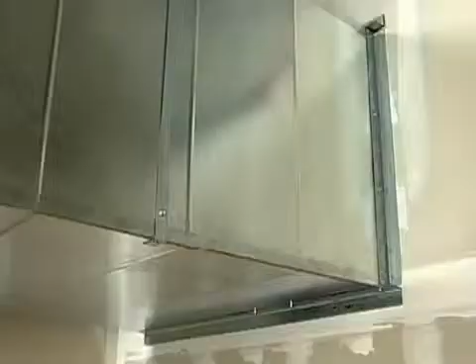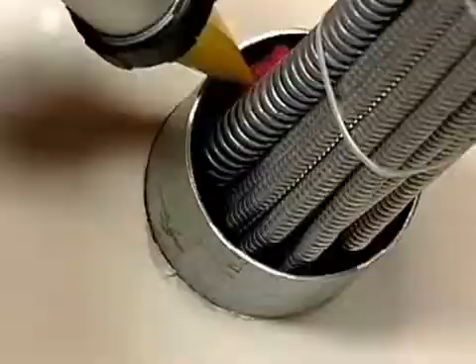Unlike pipes, ducting, and other service items which can be fire stopped and forgotten, low voltage wiring, such as voice and data cabling, almost always require future access. This presents a problem for traditional fire stop methods because many of these products are installed wet and then cured to form a permanent fire stop seal. This makes future retrofit difficult and time-consuming since the cables are literally glued together as the fire stop compound cures.

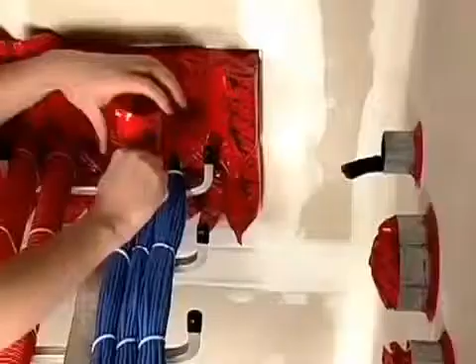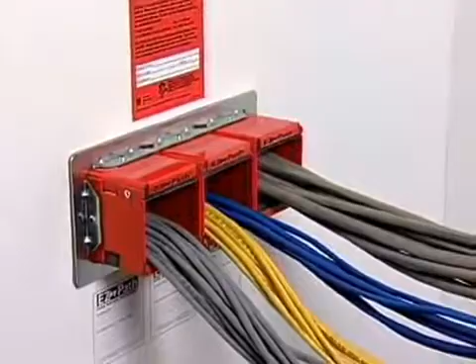There are, however, alternative solutions available for sealing high-traffic openings in smoke and fire barriers, which allow you to easily handle future retrofits. In this video, we'll discuss how to determine what products and methods should be used to properly fire stop high-traffic openings with retrofit in mind.

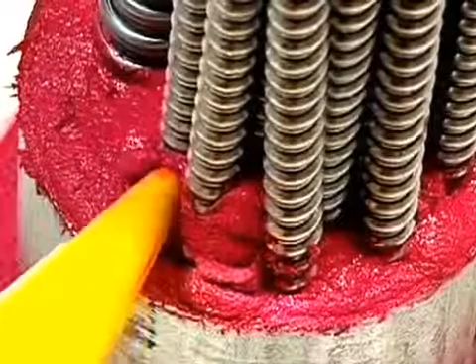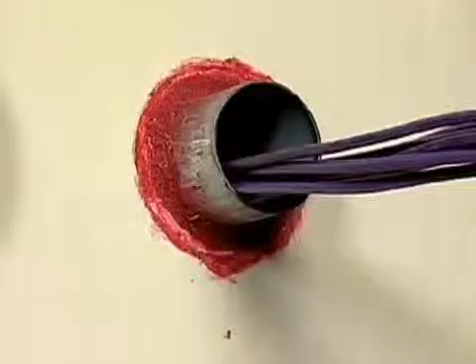Most fire stop materials are designed to be installed once and left alone, which is fine unless future access is needed. Penetrations in fire barriers that may require future access are known as high-traffic openings. The most common examples include cabling through interduct, sleeves, tray, and raceways. A common example is a penetration made in a temporary smoke or fire barrier. While these openings must be properly sealed, a re-enterable fire stop material simplifies the work when changes are made.

Naturally, the amount of change that an opening sees differs from one facility to another, making a universal definition for the term high traffic impossible. For this reason, many facilities have carefully reviewed which penetrations require the most frequent access and physically labeled them as high traffic to remove any confusion in the field.

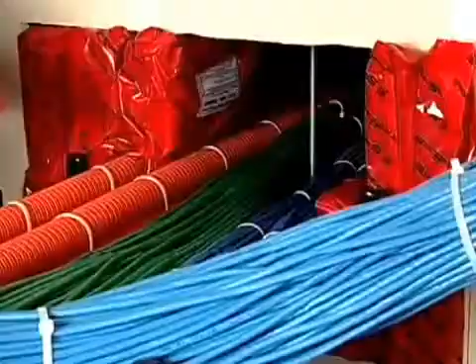Traditional fire stop compounds such as caulk and mortar are not considered re-enterable or retrofittable because they're installed wet and then cure or dry, making them labor-intensive to remove and expensive to replace. Re-enterable or retrofittable are industry terms describing fire stop materials that are specifically designed for high-traffic openings because they can be easily removed and replaced.

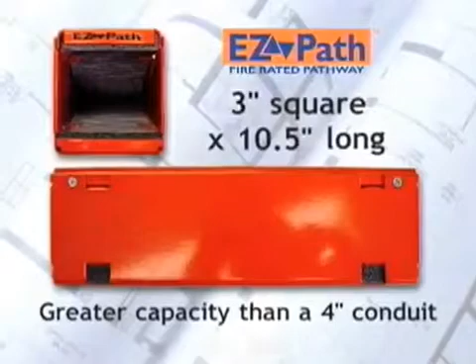Products such as Firestop Pillows, non-curing putties, and newer pathway devices are quick and easy to change and are by far the most popular fire stop choice for high-traffic openings. While re-enterable fire stop materials may cost more initially, they quickly pay for themselves as they don't need to be replaced each time there's a change.

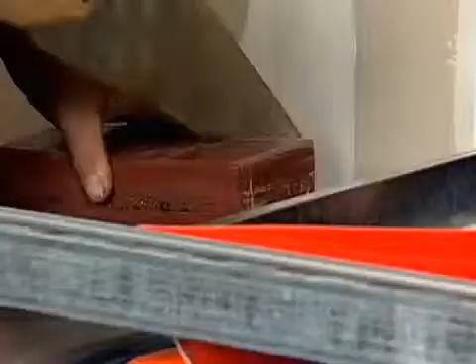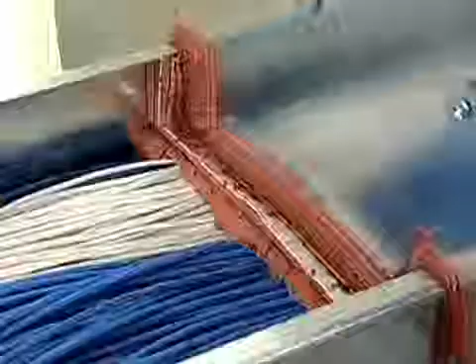Other traditional products used in high-traffic applications include foam bricks and intumescent composite sheets. While both of these products do not meet our definition as true high-traffic products, easily installed and reusable, both, however, are aesthetically pleasing as installed and are well suited for closing down larger openings. The key for both types of products is to design uses where once installed, removal will not be required for future cable changes. An example of this is the use of composite sheets in conjunction with newly developed self-contained Firestop Pathway devices, which we will discuss in greater depth later.

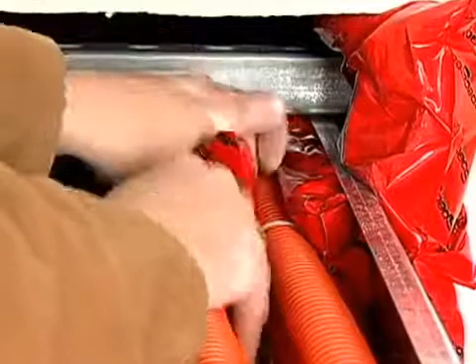Clearly, many different approaches exist, all of which are legitimate products with UL Firestop listed systems. The key to system selection in high-traffic openings is thoroughly understanding the differences of each, so that it is clear not only how easy or difficult a system is to install initially, but also during the many retrofit cycles anticipated over time. Not only will this careful selection process minimize operating costs and improve compliance, but it will also help to ensure life safety.

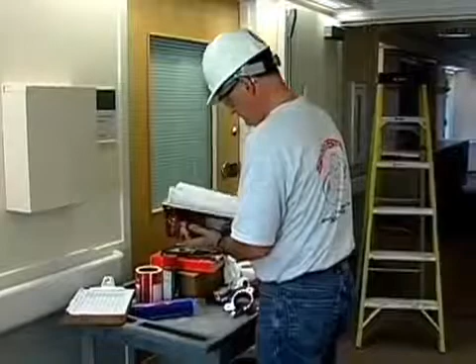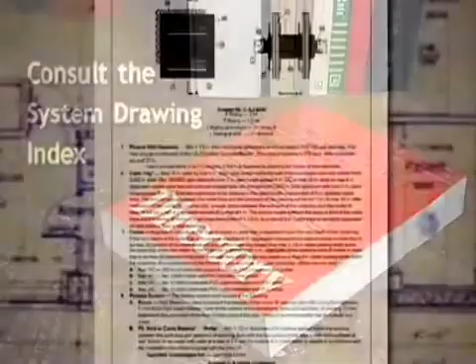Once you have determined that a penetration is indeed high traffic, the next step is to find a UL system that permits a re-enterable fire stop. Many facilities have standardized operating practices that specify this for you. The UL system drawing dictates what products may be used and how they may be installed for your specific application. To locate the proper UL system, consult the System Drawing Index at the front of the UL Fire Resistance Directory. It is here that you will learn if re-enterable products like putty and pillows are permitted, or if a more permanent product must be used.

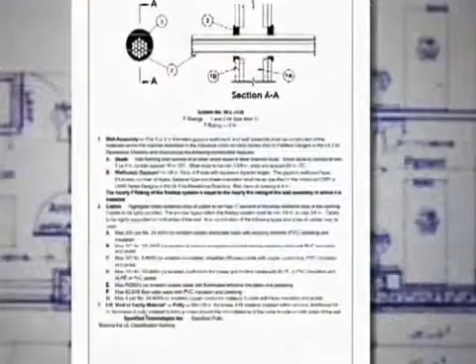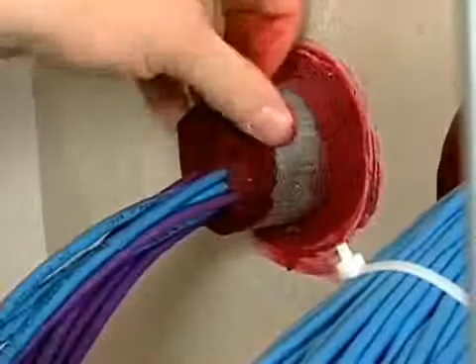In addition, the system information will dictate such things as how the materials must be installed, what accessories are required, and limit such variables as the number, load, size, and type of cables, sleeves, and trays. For example, if we have a small cable bundle through a sleeved opening in a 2-hour gypsum wall, we might search for a system drawing and find that we can achieve a 1 or 2 hour rating by installing a 5/8 inch depth of either Firestop sealant or putty. Because we want a re-enterable material, the system using putty would be favored.

However, that same system has a maximum cable load limit of 47%. So if your as-built condition exceeded that amount, you'd have to either reduce the number of cables in the sleeve or continue searching for another system that permitted a greater cable load. If you come across a non-standard penetration that the UL system drawing doesn't address, you should notify a supervisor who will contact the factory for installation instructions specific to your application.

Now, it's important to remember to never install Firestop without proper documentation. This is your evidence of compliance, which may be required by an authority having jurisdiction. And by strictly following the installation instructions in the UL system information, costly mistakes and liability can be avoided.

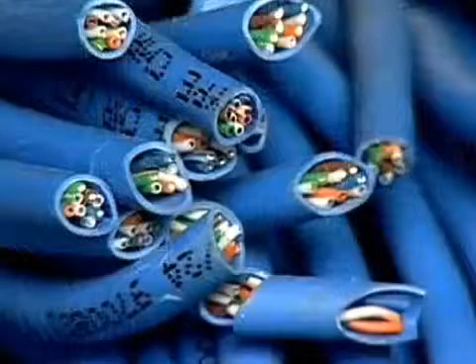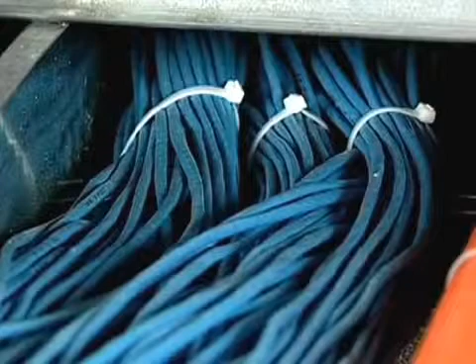While all this may seem like overkill, it's done because Firestop is easily prone to misinstallation, especially in cable applications. Cable jacketing is a source of fuel that burns rapidly and releases lethal gases during combustion. When these cables are bundled together, the fuel load grows significantly and permits a fire to easily breach a fire barrier. This makes the installation of Firestop extremely critical.

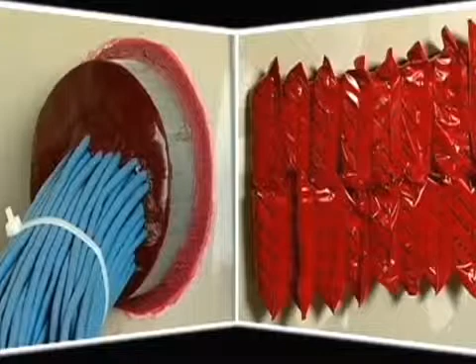While putty and pillows are intumescent and expand with heat, there are limits to what they can do, and these limitations are clearly spelled out in the UL system information. As discussed earlier, mortar and caulking compounds are installed wet and cured to form a tough seal. Firestop putty, by contrast, behaves more like molding clay and is designed to remain pliable over time.

This feature not only permits faster re-entry, but also saves money, as the same putty can be removed and, as long as it's kept clean, reshaped to form a new seal after cable changes are made. It's important to recognize, however, that Firestop putties are designed for smaller openings such as cable bundles and sleeves, and are not designed for large annular spaces such as around cable trays.

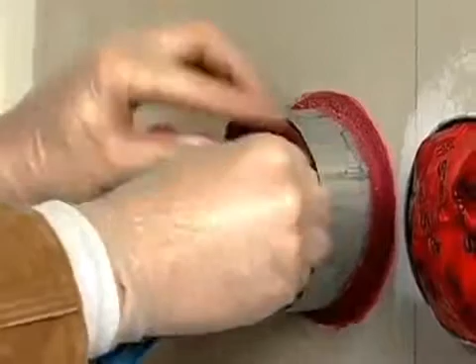Because putty doesn't flow easily between cables like caulking compound does, in cable bundles there's a maximum diameter that can be effectively sealed using putty. Caution should be exercised to ensure you don't exceed the maximum diameter. Only a few systems using putty can address cable bundles over 2 inches.

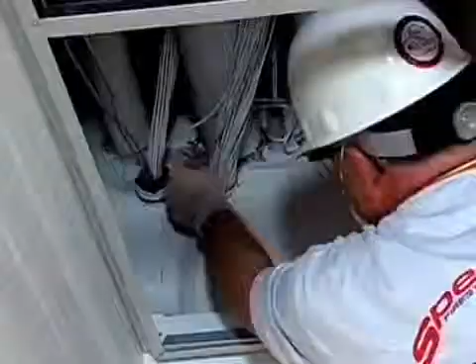The fact that putty can be removed and cables so easily added does make it a good choice for cable applications. However, this also means that unless great care is exercised, cables may be added until the sleeve is filled with cables and no fire stopping remains. Thus, vigilance is required to make sure that cable penetrations remain compliant.

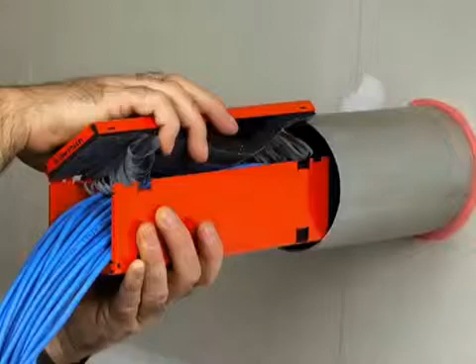A more foolproof approach to Firestop cable penetrations is the use of newly developed self-contained Firestop pathway devices. These pathways can be installed around existing cables or installed in advance of the cabling process. The built-in fire stopping protection is permanent and need not be removed in order to add cables. This makes cable moves, adds, and changes a great deal easier and safer.

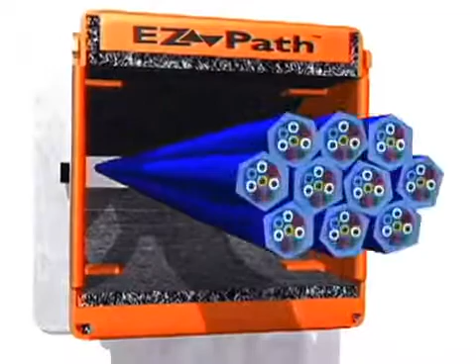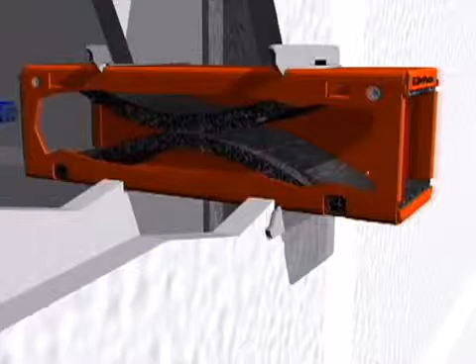Users also benefit from the fact that one easy installation provides both the cable raceway and the fire stopping in the same simple step. The fire stopping system automatically adjusts from empty with no cables to full and everywhere in between, allowing them to be installed during construction or in anticipation of future capacity requirements. When exposed to fire, built-in intumescent inserts quickly expand to tightly seal the pathway and block the spread of fire.

Another advantage of these devices is greater control of smoke leakage. The area between cables, referred to as interstitial space, is very difficult to seal, especially with putty. The larger the cable bundle, the greater the amount of leakage we can expect through the penetration.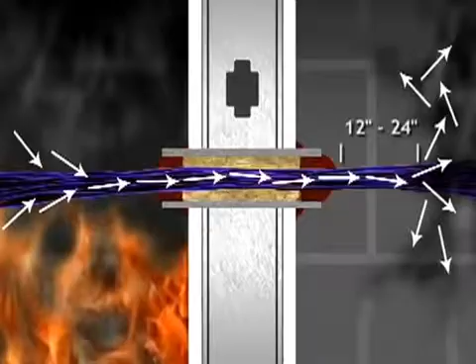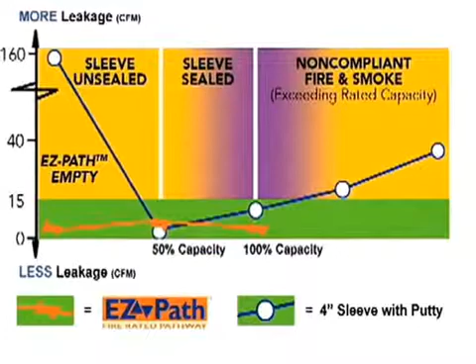While some UL classified systems utilizing putty for cable penetrations do have the optional L rating, regular steel sleeves are unsealed as installed. And even when sealed, the amount of leakage will vary according to the size of the sleeve, the amount of cables installed, and how good a sealing job the applicator has managed to do. Firestop pathway devices sealed as installed and utilizing a fixed cable volume provide predictable leakage values which greatly assist in the process of smoke leakage compliance.

In larger openings, such as cable tray penetrations where putty is inappropriate, the Firestop pillow is ideally suited. The principle behind the Firestop pillow is similar to that of sandbags, which are compressed and packed tightly together, except that pillows are designed to hold back the products of combustion rather than water.

There are many different versions on the market, but they all have one thing in common. They must be compressed a minimum percentage into the opening. While the percentage varies by manufacturer, proper compression is critical to the performance in a fire. The most user-friendly are those that compress easily and then recover quickly after compression.

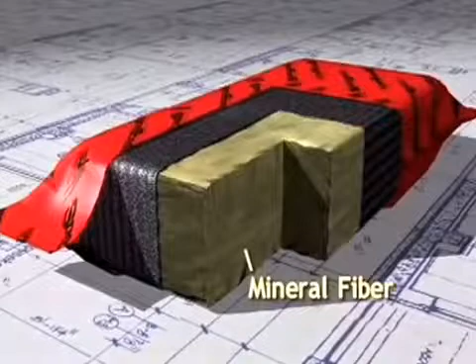Another important feature that makes pillows easy to use is having a smooth outer surface that permits easy insertion and removal during retrofits. The most popular pillows are made from blocks of mineral fiber that are coated on all sides with an intumescent coating and enclosed in a polyethylene liner.

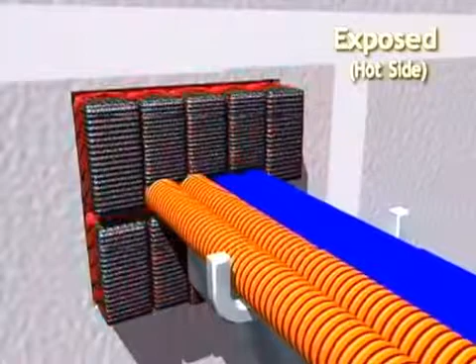Here's how they work. During a fire, the polyethylene bag shrinks away in seconds, exposing the intumescent core. As the combustible cable jacketing burns away, voids open up and each pillow begins to expand. The combined effect of all pillows expanding simultaneously fuses them together in a solid, monolithic char that blocks the passage of smoke, flames, and superheated gases for up to 4 hours.

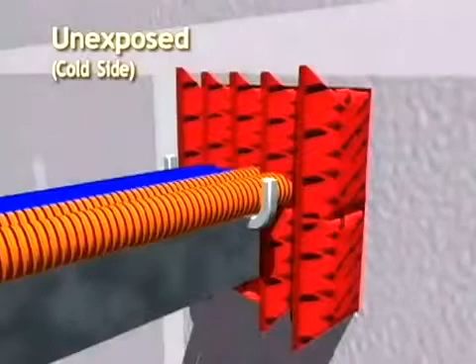The performance of a Firestop system in a real fire is largely a function of how it's installed. Now, while care must be taken during the UL system selection, the work's not complicated. The skills needed to install these products are common, but the willingness to comply with the requirements spelled out in the UL system is not.

Being designed to remain pliable, Firestop Putty very easily takes on whatever shape you give it, making putty extremely simple to install. The requirements for putty vary dramatically from one UL system to another, so it's critical that you confirm such variables as cable diameter, putty thickness, annular space, and mineral wool requirements.

Once you are sure that your application can be properly sealed using putty, most installations are simply a matter of forming the putty into a rod. The diameter of the rod should be equal to the minimum putty thickness required in the UL system information.

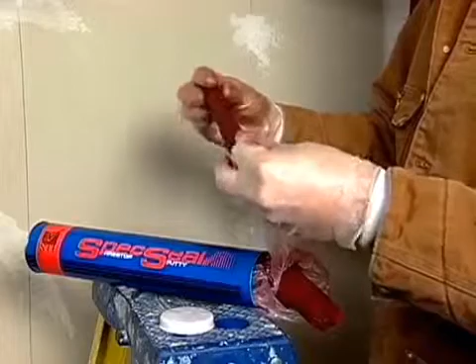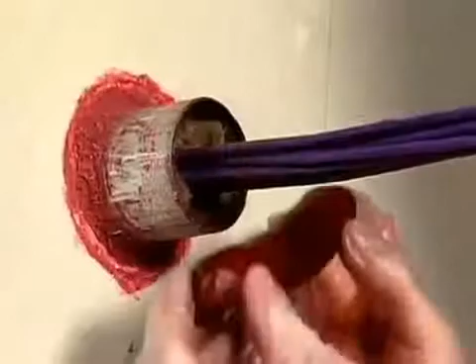When mineral wool is required, be sure to recess it into the opening, leaving enough room for the proper depth of putty. Then bend the rod of putty around the cable bundle and between the cables if any gaps are present or the spacing allows it. Form a secure bond to both the cable bundle and the surrounding construction, in this case a metal sleeve. Wall systems require a symmetrical seal, so be sure to seal the other side in the same manner.

When removing putty for retrofit, be sure to set it aside in a clean location to keep it from becoming contaminated with gypsum dust or other debris. Dust is a bond breaker and prevents adhesion during replacement. If the putty becomes contaminated, it should be replaced.

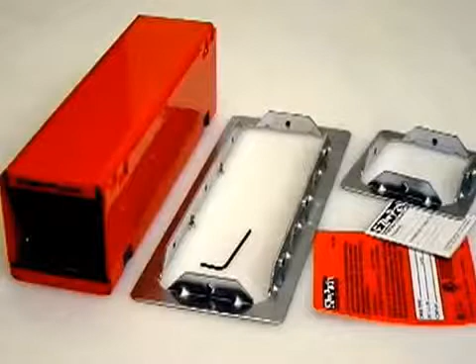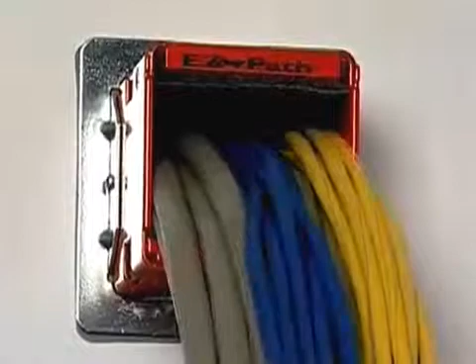The fire-rated EZ-Path is a self-contained unit that is quick and easy to install. EZ-Path devices eliminate a lot of decision-making. UL classified for 0 to 100% visual fill, these products require no complicated calculations. Cables can simply be installed until the pathway has been filled.

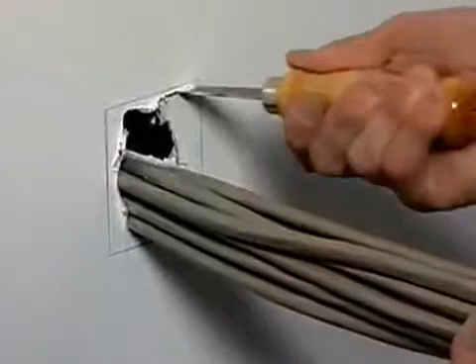For new cable installations, a properly sized hole is cut in the wall and the wireway unit is slid into place. Wall plates secured to the pathway with set screws lock the wireway in position with no mechanical attachment to the wall. When installing around pre-existing cables, the wireway is easily split and reassembled around cable bundles and slid into the wall to effectively restore the fire barrier integrity.

The EZ-Path self-contained Firestop system may be installed as a single unit, or for additional capacity or segregation of cables by use or trade, the pathways can be gang-mounted using convenient mounting wall plates for up to 7 devices. A variety of accessories allow these pathways to adapt to a wide variety of wall and floor applications.

Like putty, pillows also are simple to install. But to work properly in a fire, they must be compressed tightly into an opening, and every brand of pillow requires a different amount of compression. Therefore, unlike putty, some simple arithmetic is required to calculate how many pillows are needed for each opening. The pillows we're using for this demonstration require a minimum compression factor of 1.4.

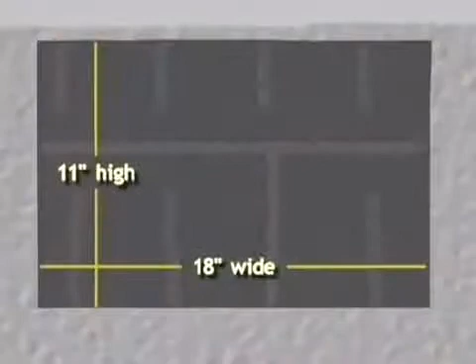Remember, even though compression rates vary depending on the brand of pillow you use, calculating the number of pillows needed is simple arithmetic. We start by calculating our opening size, which in this case is 11 inches high by 18 inches wide, or 198 square inches. Next, we calculate the area taken up by the tray and cable load.

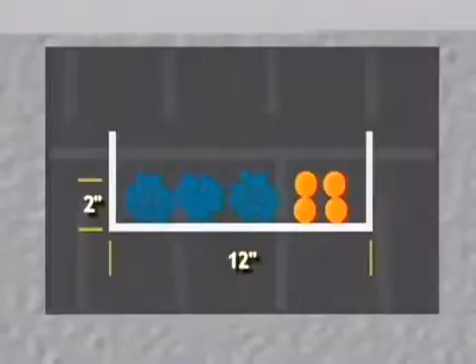Now, the tray is 4 inches high and 12 inches wide, which would take up 48 square inches if fully loaded. In this case, the load is approximately 2 inches deep on average across the entire width of the tray, or 24 square inches. Now, because the depth of a cable load isn't uniform, you'll need to do some estimation. Estimate on the safe side, figuring the bundle takes up less space than it actually does.

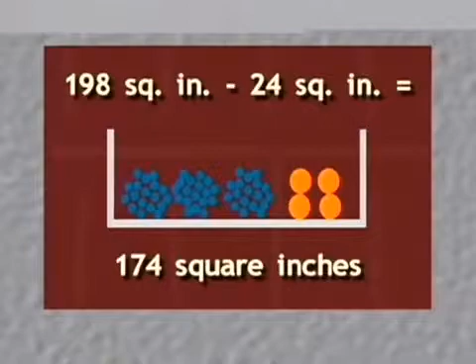By subtracting the area taken up by the tray and cable load, 24 square inches, from the overall area of the opening, 198 square inches, we find that we have 174 square inches to seal. Simply multiplying that amount by the compression factor of 1.4 reveals that we need 243.6 total square inches worth of pillows to obtain necessary compression. To determine how many pillows we need, we divide this number by whatever pillow size we plan to use and round up to the next one.

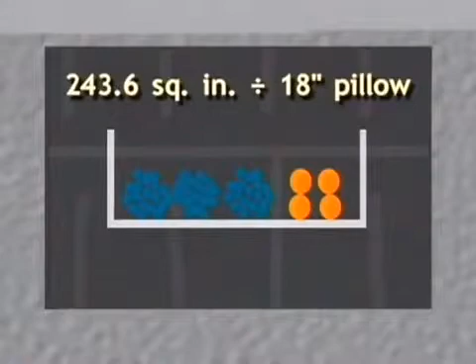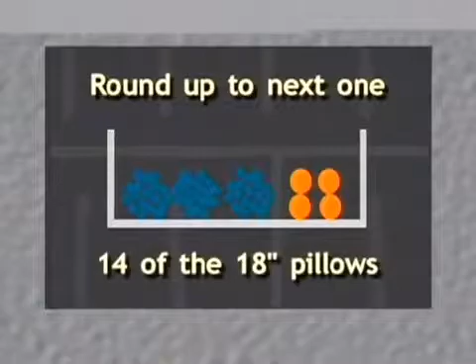To help you address a wide range of openings, pillows come in a variety of sizes. The pillows we're using for this demonstration come in 4 sizes, from 4 to 18 square inches, all of which are 9 inches long. If we use the largest size and divide 18 into 243.6, we realize that we need 13.53 pillows. By simply rounding up, we find that 14 of the 18-inch pillows are needed.

In reality, the largest pillows may not fit well, requiring the use of other sizes. This is perfectly acceptable, provided that the overall combination of pillows achieves the 1.4 compression rate. Once in place, look for small gaps or openings that couldn't be sealed by the pillows. Later, when small cable changes are necessary, a single pillow can be removed and replaced without having to remove and rebuild all of the pillows again.

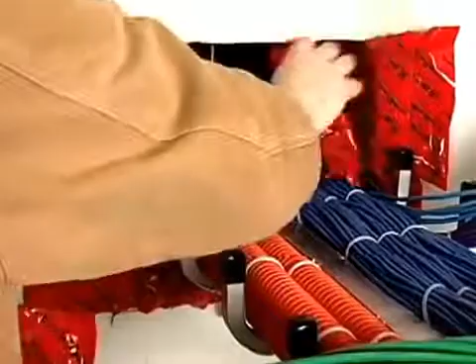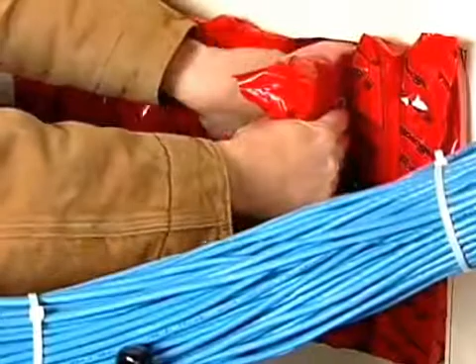For more substantial cable jobs, the pillows can simply be removed down to the tray level without disturbing the pillows below, the new cables added, and the system easily restored to its proper rating. If a substantial number of new cables are added, you may need to recalculate the number of pillows needed to ensure that the proper compression rate is maintained.

Properly sealing cables isn't difficult, but it does require some effort to research the proper installation requirements. One useful tip to help speed the time needed to do this work is to standardize around certain UL systems. This way, you can memorize the specifics and avoid researching each and every opening that you encounter.